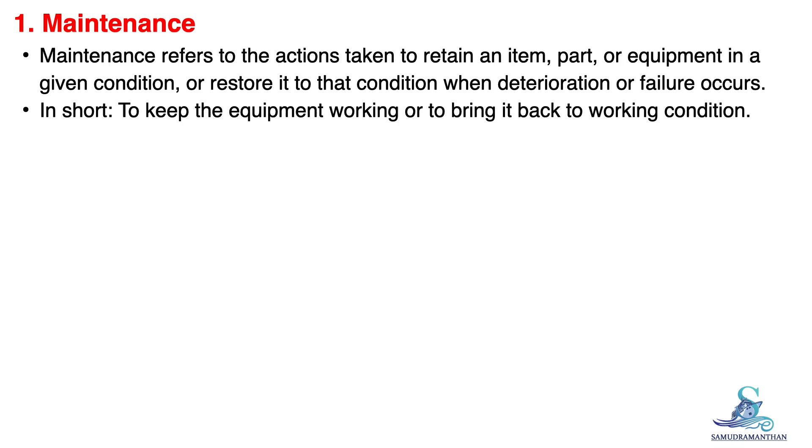Let us begin with the term maintenance. Maintenance simply means taking action to keep equipment in good working condition or to restore it if it stops functioning properly. In other words, it's about making sure that machinery continues to perform as intended, and if it doesn't, we bring it back to that state through proper repairing or servicing.

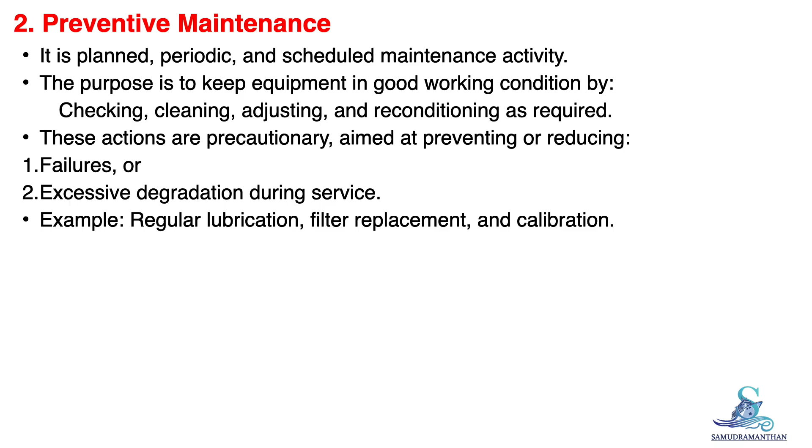Next, we have preventive maintenance. This is the maintenance we do before a failure occurs. It follows a planned and periodic schedule, such as daily checks, weekly servicing, or annual overhauls. The idea is to prevent problems rather than fix them later. For example, changing oil at regular intervals or inspecting filters before they get clogged. So, preventive maintenance is proactive, not reactive.

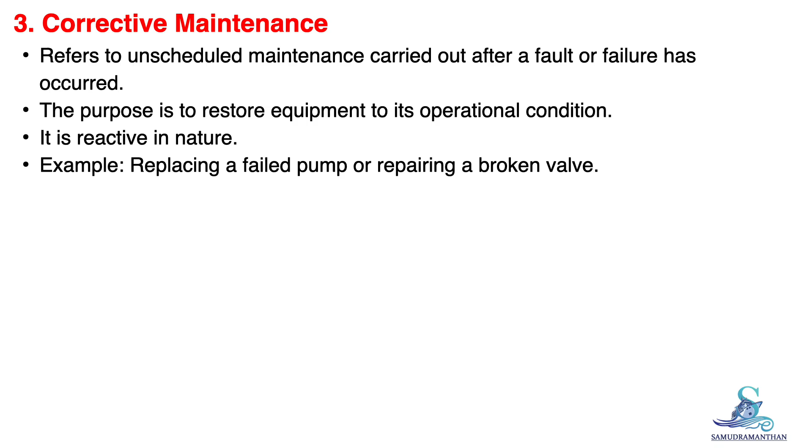Corrective maintenance is the opposite of preventive. It is done after a breakdown or fault has occurred. When a piece of equipment fails, we identify the cause and repair or replace the faulty part to restore operation. This type of maintenance is unscheduled and often requires immediate attention. For example, repairing a pump that has suddenly stopped working.

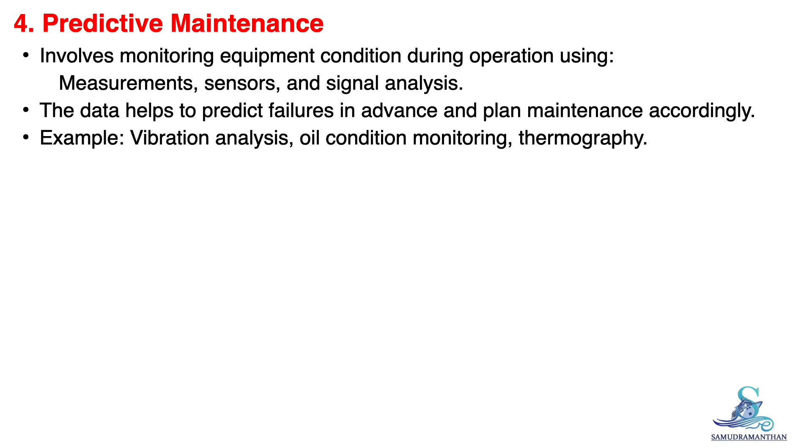Now, let's move to predictive maintenance. This method uses measurements, monitoring, and signal analysis to predict when a failure might happen. It allows engineers to carry out maintenance just in time, not too early, not too late. We use modern tools like vibration analysis, oil testing, and thermography to assess equipment condition during operation. It's a smart approach that combines technology with engineering judgment.

Every good maintenance program is guided by a maintenance plan. This is a document that outlines how maintenance will be managed, including what needs to be done, when, and with what resources. It lists tools, facilities, schedules, and even manpower requirements. Essentially, it is the roadmap for all maintenance activities on board.

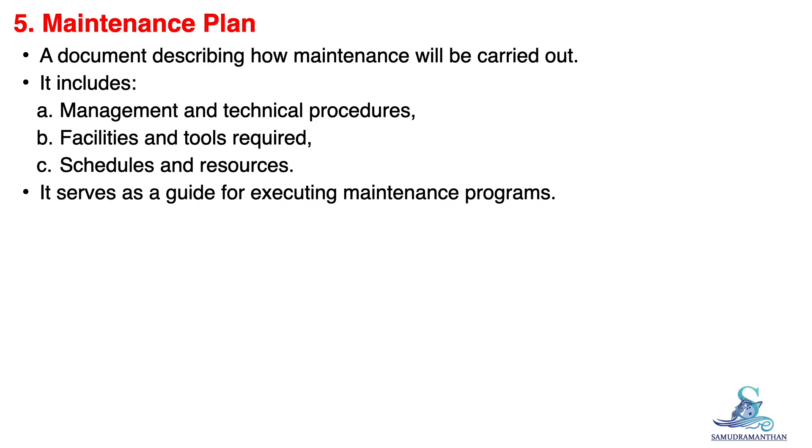Now, what do we mean by reliability? It is the probability that a piece of equipment will perform its function satisfactorily for a given time under specified conditions. In ships, reliability is vital because we need continuous and stable operation. Breakdowns at sea can be costly and dangerous. Hence, marine engineers must ensure systems are reliable, especially in unattended machinery spaces where regular monitoring is limited.

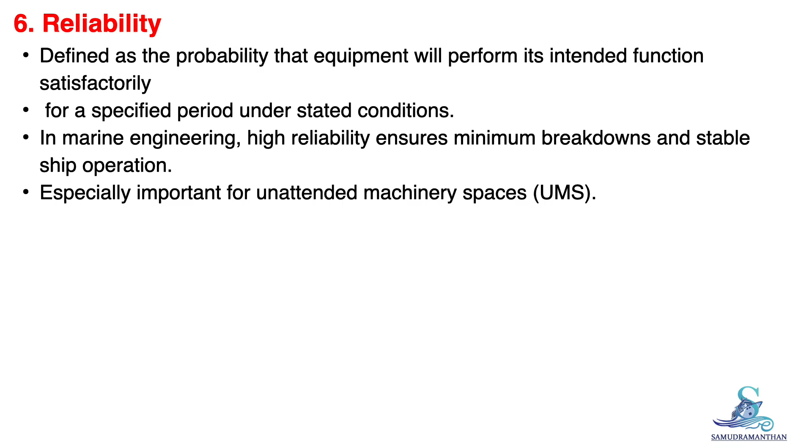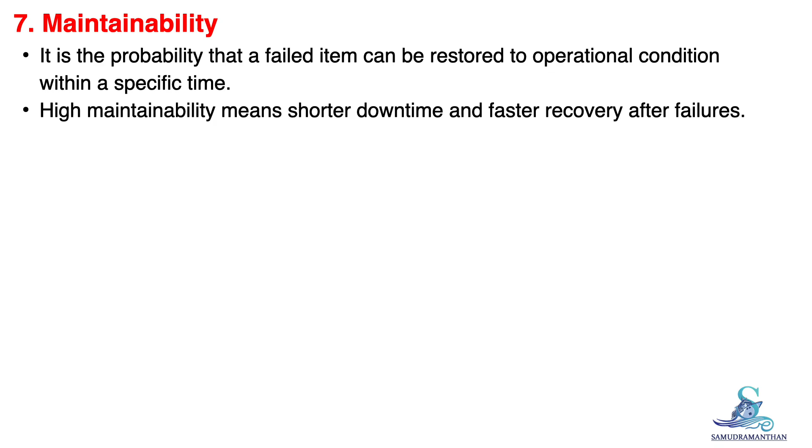Maintainability refers to how quickly and easily we can restore equipment to working condition after a failure. If equipment is designed and maintained well, it will be easier and faster to repair. In other words, maintainability helps us reduce downtime and increase availability.

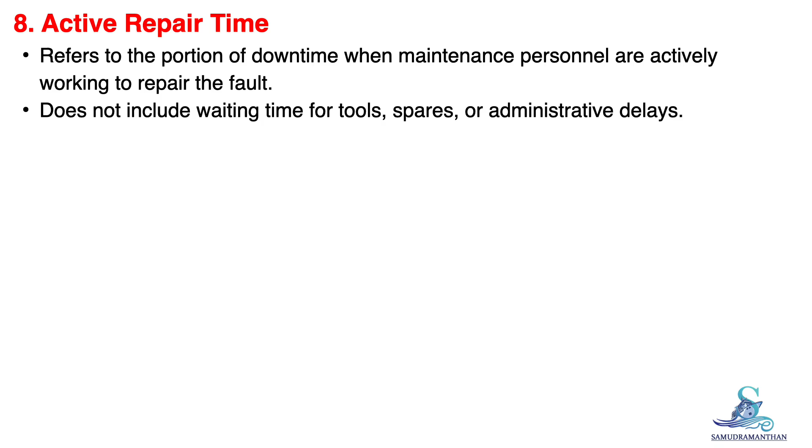Now let's talk about active repair time. This is the actual time during which maintenance personnel are actively engaged in fixing the problem. It does not include waiting time for tools, spares, or paperwork. Only the time spent physically working on the repair.

An overhaul is a comprehensive inspection and restoration of machinery. It is usually done after a certain number of running hours or at scheduled intervals. During overhaul, the equipment is opened up, inspected in detail, worn parts are replaced, and everything is reassembled and tested. The goal is to extend the service life and reliability of the machine.

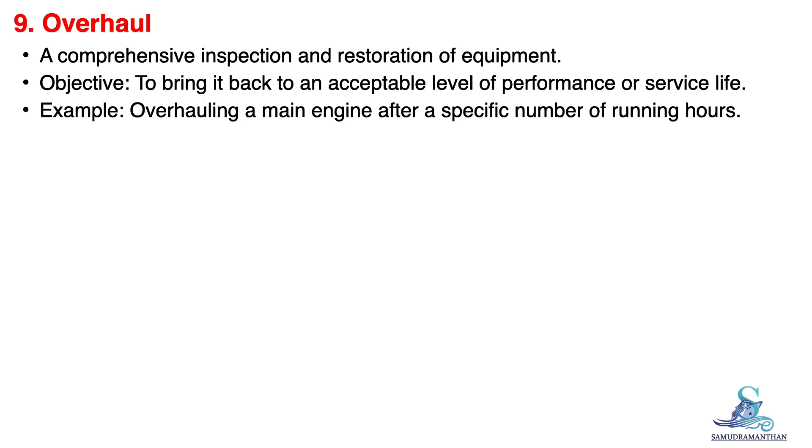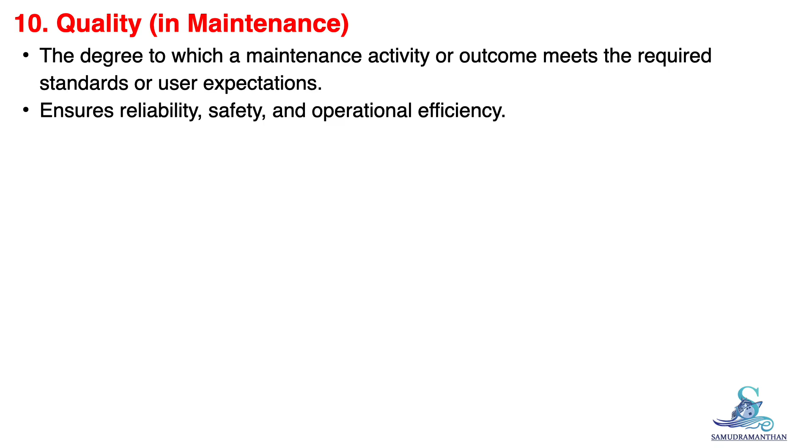When we talk about quality in maintenance, we mean how well the maintenance work meets the requirements, standards, or expectations. Good quality maintenance ensures safety, reliability, and operational efficiency. Poor quality work, on the other hand, can lead to repeated breakdowns and higher costs.

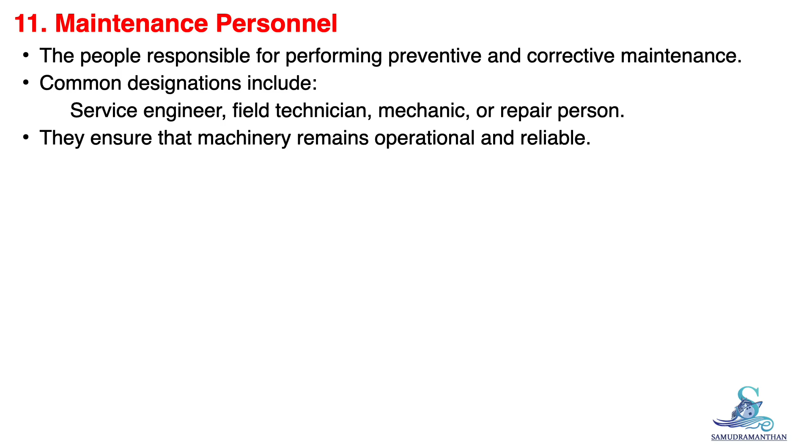Maintenance personnel are the people who perform these tasks: preventive, corrective, and predictive maintenance. They may be called technicians, service engineers, mechanics, or repair personnel. Their skill and attitude directly affect the performance and reliability of the ship's machinery.

Finally, we come to inspection. Inspection means carefully observing and assessing the condition or performance of the equipment. It is often the first step in detecting problems early. For example, during an engine room round, if we notice unusual noise, vibration or leakage, that inspection helps us take timely preventive action.

To summarize all the terms, maintenance, preventive, corrective, predictive, reliability, and others are interrelated. Together, they form the foundation of the maintenance philosophy every marine engineer must understand. By mastering this terminology, we can plan, execute, and monitor maintenance effectively, ensuring safe and reliable ship operation.